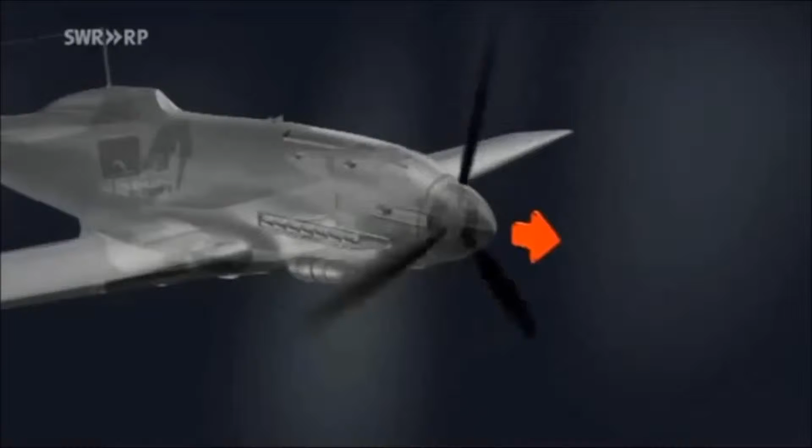Hi, my name is Ricardo, and I'm going to be presenting to you guys the jet engine and the history behind it. Back in the early 1900s, they had propeller-powered airplanes, and they were not fast enough, and they were really loud. And Frank Whittle wanted to produce something that was quieter and that uses the exhaust gases from the propeller-powered airplanes in order to create more thrust.

Isaac Newton used this theory with a balloon, which is his third law. For every action, there's a reaction. This is Frank Whittle, and he is the creator of the first jet engine, turbojet engine. The jet engine is created into three parts: the compressor, the combustor, and the turbine.

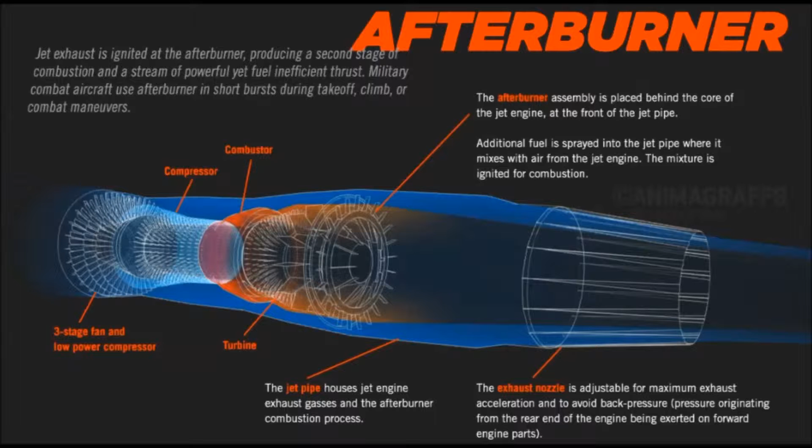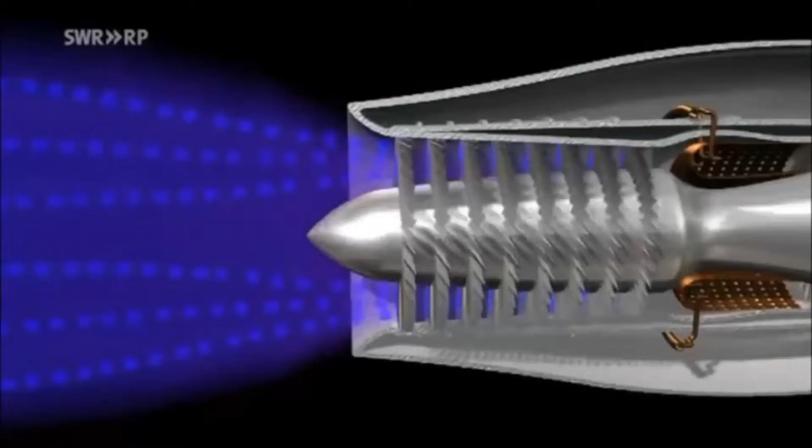For that, the engine has compressors built into it. Modern engines have up to 17 compressors, one after the other. The numerous blades compress the air more and more. That way the pressure is increased by up to 30 times.

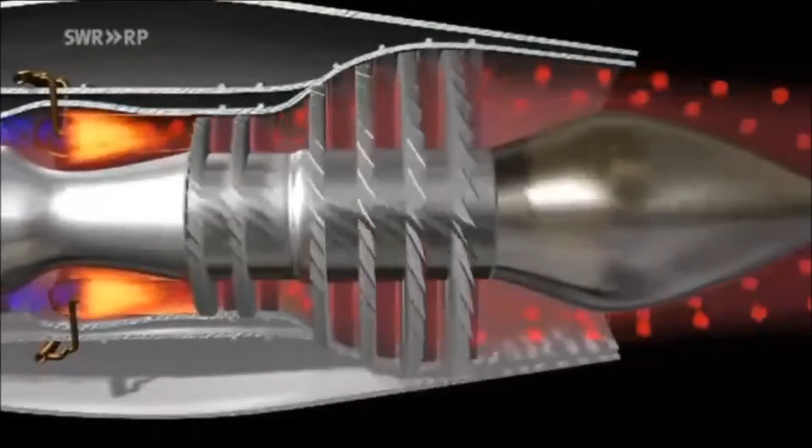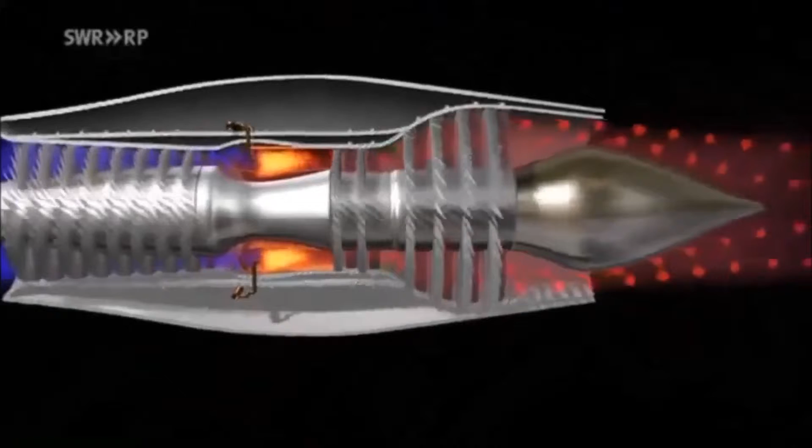But the compressors themselves need to be powered. This is done by turbines in the engine that are struck by the hot exhaust. These gases travel extremely fast after the explosion in the combustion chamber and set the diagonal turbine blades, similar to those of a propeller, into motion. This rotation is transferred to the compressors via shaft. It is a self-contained system.

Frank Whittle handed in his invention at the patent office in 1930, but he lacked financial backing. The development stagnated. The Royal Air Force showed no interest either. So instead, Whittle worked on his training as an engineer. This is Hans von Ohain, a German physicist and designer of the first operational jet engine, the Heinkel He 178. But von Ohain suffered similar problems.

The German government showed no interest. The decision-makers in the German Air Force lacked the technical understanding to properly evaluate this strange propellerless aircraft. In addition, the He 178 had a very high fuel consumption. As a result, its range was very low. Then the course of World War II necessitated the development of a jet plane. Miracle weapons were needed.

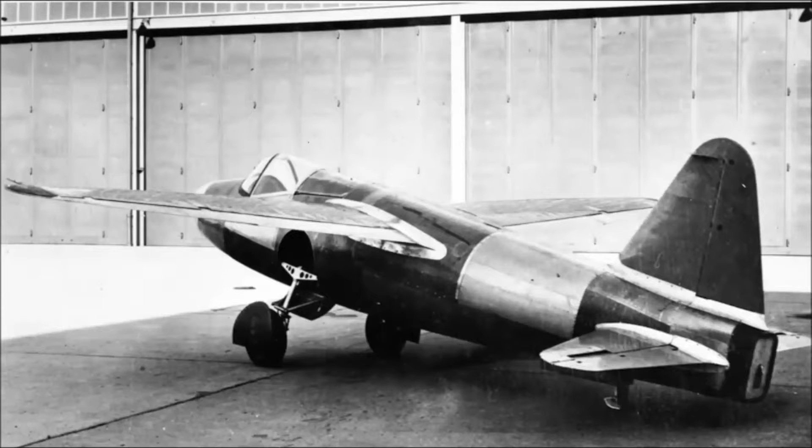This is the Heinkel He 178. Its first flight was on July 20th, 1939 with a high speed of 466 miles per hour. This is the Me 262, aka the first operational jet-powered fighter aircraft with a high speed of 541 miles per hour. Its first flight was on April 18, 1941.

But it was introduced on June 30, 1944, and retired the year after that due to takeoff complications. The nose would not dive in order for the wings in the back to lift up. They had to tap on the brakes at about 120 miles per hour in order for the nose to dive a little bit and in order for it to take off, and that was not a good thing.

The legendary Comet was the first passenger aircraft to be powered by jet engines. In 1957, the Boeing 707 was introduced. One of the novelties that made the 707 into a model for all modern passenger aircraft was the addition of a fan to the engine. In modern engines, this fan has taken on huge proportions.

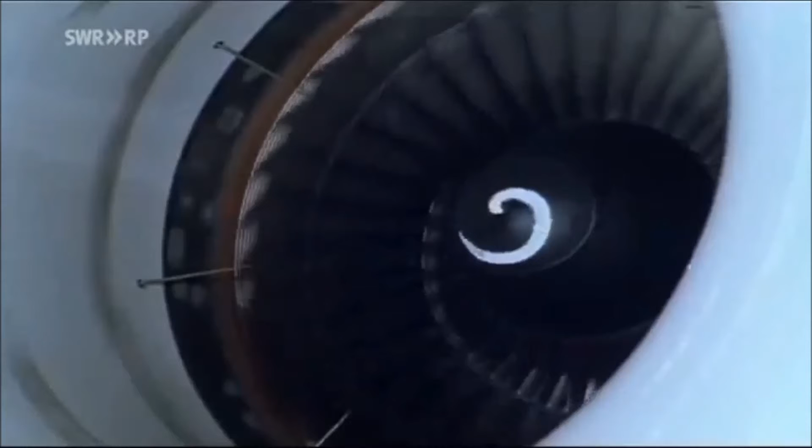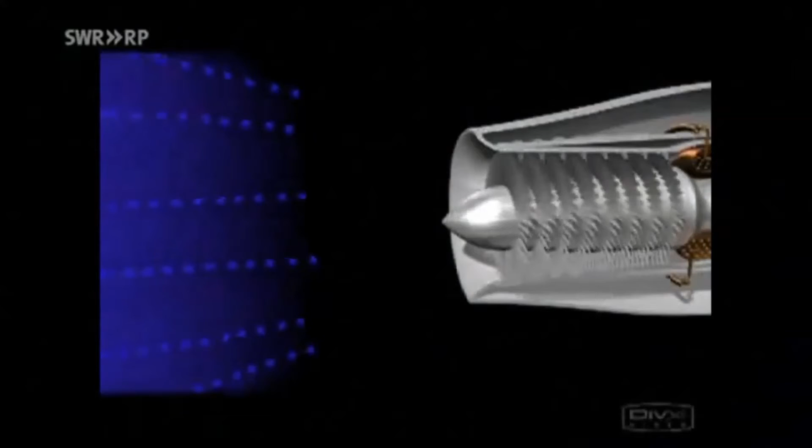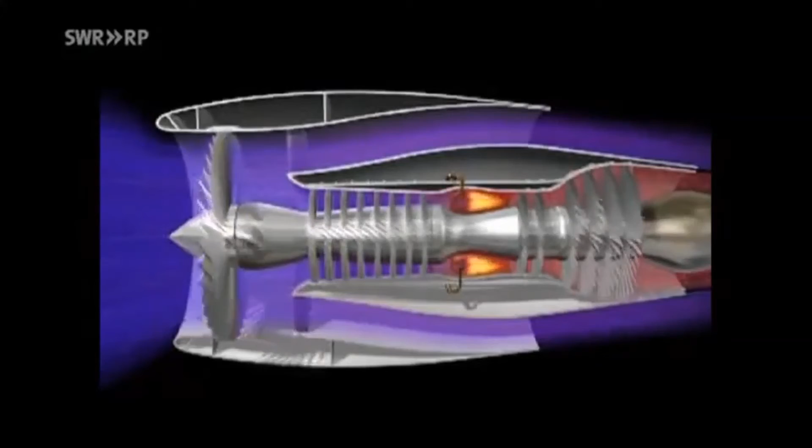One of the functions of the fan is to act as a pre-compressor, an added compressor stage as it were. It also has a second important function. Most of the air sucked in by the fan is directed around the engine. This bypass air surrounds the engine like a coat, which means it remains cool and can thus work better.

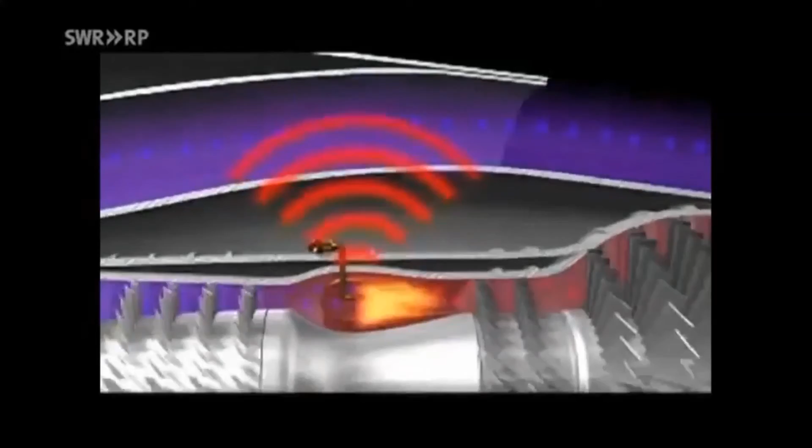In addition, a thick sound-insulating air layer forms around the combustion chamber, in which a huge amount of noise is created. These days, as much air as possible is led through this bypass. This makes the aircraft more efficient, more economical, and quieter.